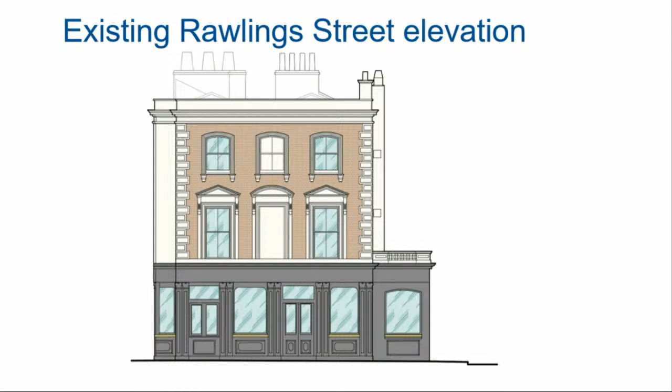So that's the existing and that's the proposed. The other thing to point out is the mansard roof that you can see clearly there above the existing building and above the extension to it.

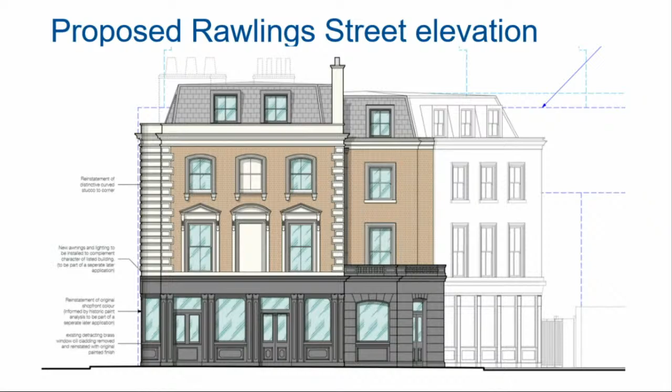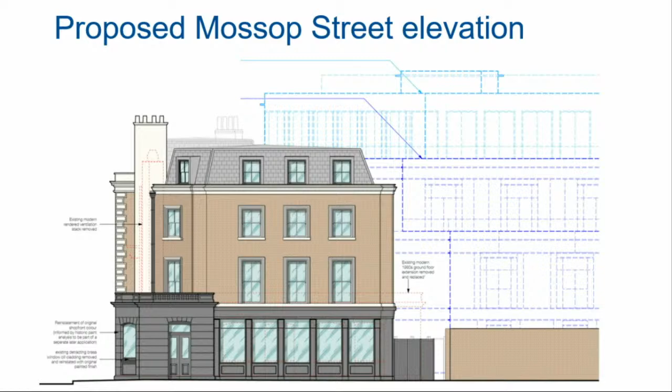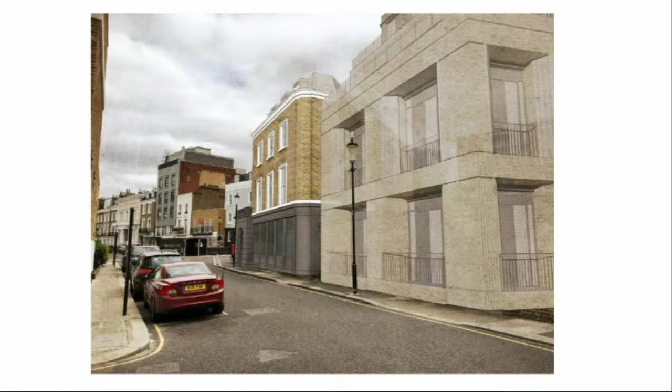And then finally some montages. So the application site, as you can see there, is basically brick with a mansard roof, and on the right-hand side of the image, that's the clearings development.

And that was the last slide. So I'd just draw your attention to the Addendum Reports. I thought I'd confirm that the application came to committee before, and there have been some further letters now. So the total figures in terms of people who've written in are that there are now 12 letters in favour of the development, including from the Milner Street Residents Association. And then there are 2 comments and 2 objections. That's the total through both phases of consultation.

That's the end of the presentation.

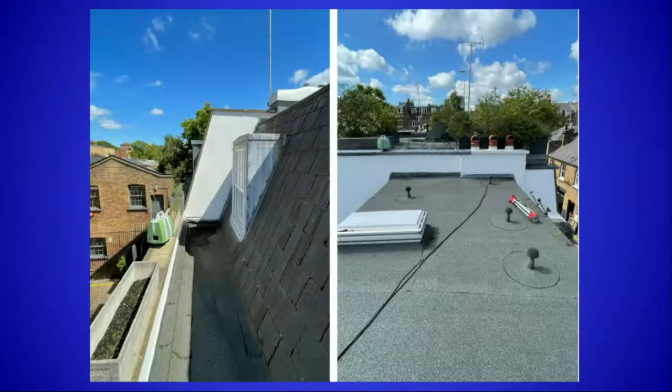Firstly, I thought I'd just show you a couple of images of the existing roof. The left-hand image is taken looking along the front of the property, and you can see the mews down to the left-hand side of the photograph. You can see immediately that the roof to the application property in the foreground is set further back than the one immediately beyond it. The right-hand photograph shows that very clearly. So you can see the property does have a flat-topped mansard roof, but it's actually a narrow version—it's set back at the rear and at the front.

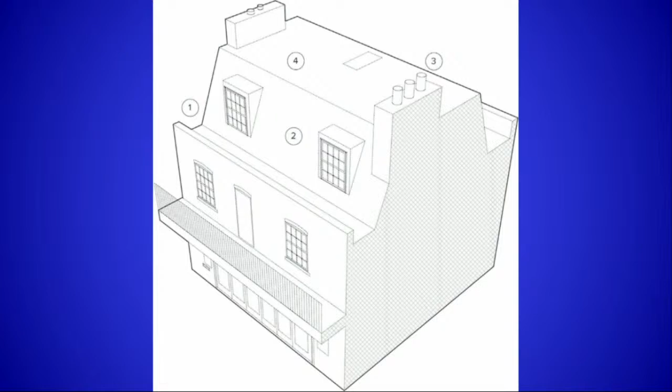That's an image of the existing property, and the next slide shows how the roof would be increased in width at the front and at the rear. You can see in the hatched form there's additional bulk proposed for the front and for the rear, which would basically bring us out in line with the neighbouring property.

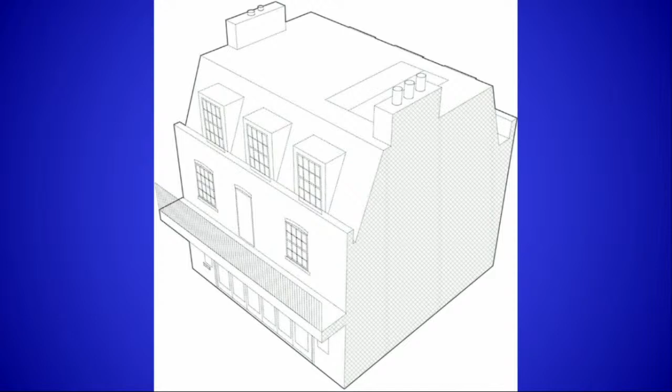You can see that within that extended roof there are now 3 dormer windows proposed on the front elevation, and there are also 3 dormer windows proposed on the rear elevation.

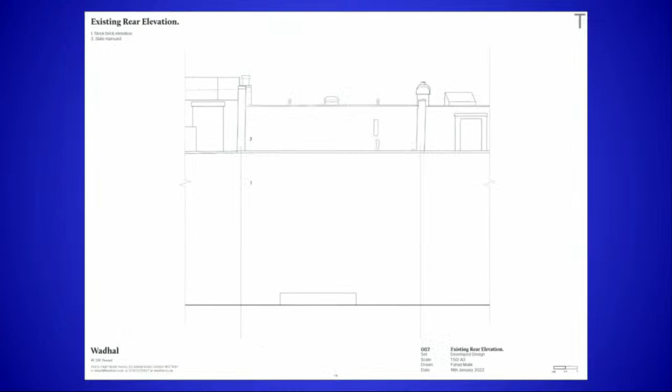I'm concerned about the glass brick aspect of this. It seems to me that, well, personally, I think it's undesirable and unwelcome, but it doesn't seem to me to be something that's fundamental to the application. I'm wondering if there would be a mechanism whereby we could in effect exclude it and take it out of the application, because I do think it would look an odd feature to have there, obviously on someone's back garden wall. Do you have any comments on that point?

The glass bricks are proposed in the rear elevation at high level. You can see them here at the left-hand side within the rear elevation in section. They are a small part of the application. I think it would be possible, if you're so minded, to condition those out. I don't think they're essential. Clearly they're part of the proposal, but the applicant clearly considers them to be beneficial. But it's certainly within your powers to add a condition removing those, if you're so minded.

So that would be an extra condition, as opposed to amending condition 2, which is obviously compliance with the drawings. You think that would be the correct way of doing it? Yes, it would be an extra condition. At the moment there's condition 11 that recommends obscured glazing for the dormer windows. So that would be a condition in its own right, not amending any other condition. So are you sure condition 2 wouldn't have to be amended? The approved plans, would they show the glass bricks? Yes, they would, as you can see in the section. So condition 2 would need to be adjusted to accommodate that.

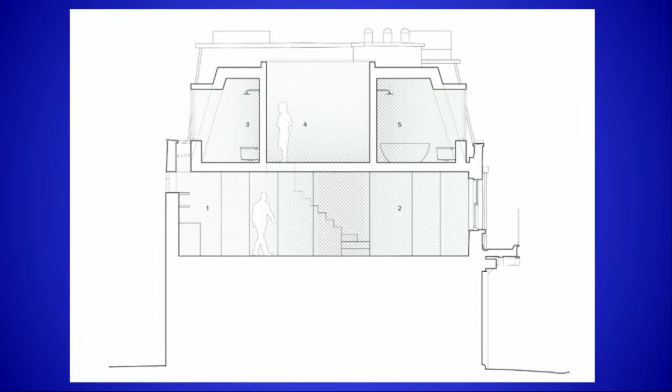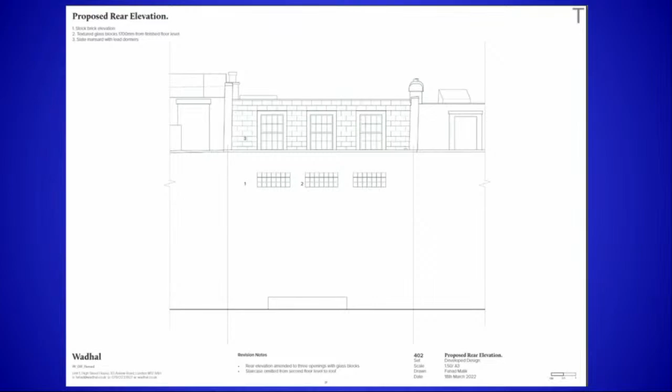Well, in that case, we need to make a decision about this. I think my own view is that in planning terms, we do have to give quite a lot of weight to the fact that the other buildings in the Mews have got these higher level mansard extensions. Obviously from the point of view of someone looking onto the back of this property, it's very desirable that at the moment there isn't really anything there. But when you look at the context, I think unfortunately the idea of having a new mansard extension is probably something that would have to be considered acceptable.

I'm not particularly happy about the glass bricks. Personally, I think if there is a proper mechanism, as Mr. Taylor seems to indicate there is, we should condition that out. I think it's an undesirable feature which is not fundamental to the application, and I think we're entitled to do it. But what do others think?

Sam? Yes, the way I was thinking about it is exactly that, and my particular concern about the glass bricks is not just that they're incongruous, but also their position - even though they're not absolutely huge, they're in that rear wall that feels part of the enclosed garden, whereas the mansard is set back and at a higher level. So I think it would affect both living conditions and character and appearance. I'm not happy with the glass bricks.

Other views? Anyone? Aaron? I just agree with you both, basically. Yeah, right, thanks. All right.

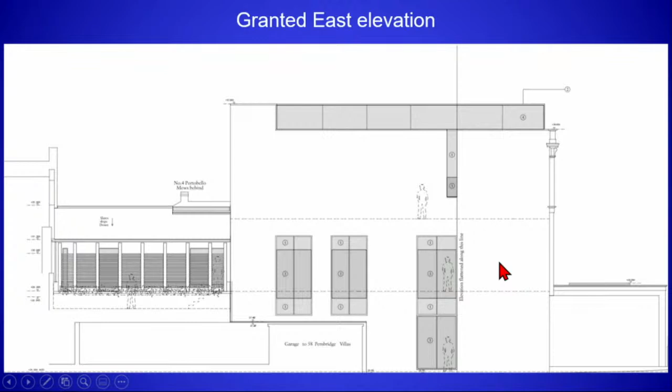What's now proposed is basically to vary the glazing. Those are the existing glazed areas and now the proposed glazed areas. The 4 oblong areas of glazing, I'd suggest, are actually a little neater and perhaps less obtrusive than those that were granted originally.

Included within the application now before you are a number of features within the flank wall. I don't know if you can see them at that distance, but essentially there are 3 ventilation louvers - one there, one here, and one there. There are also 2 flue pipes, 2 small flues that emerge through the boundary wall between two of those louvers. So there are 3 louvers and 2 pipes proposed in the flank wall.

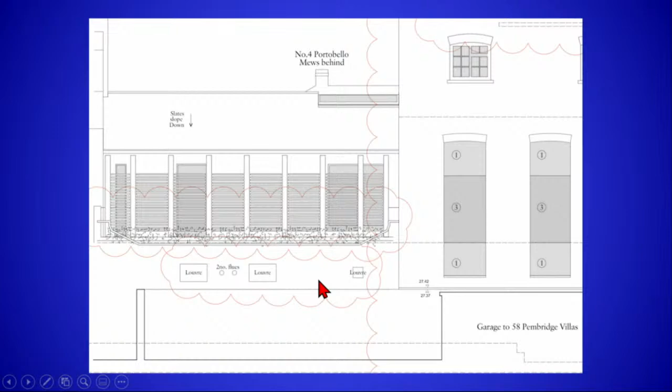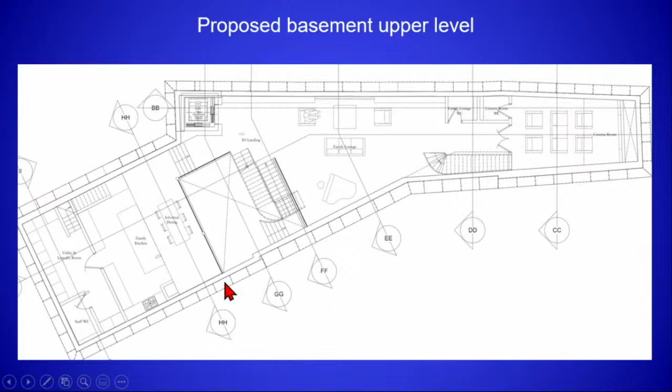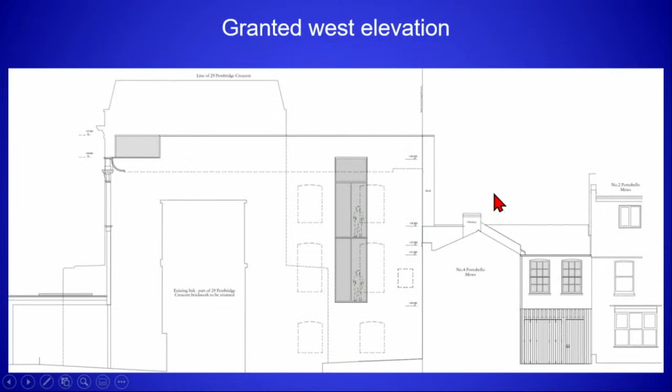Just for completeness, this is the other side - the west elevation, the granted west elevation and the proposed west elevation. There are relatively small adjustments on that side. That's the last slide, Chairman.

I've just been reminded that I was also going to recommend orally that condition 11 would need to be varied. The wording in condition 11 doesn't quite make sense at the moment because it reads 'shall be obscurely glazed and fixed shut up to 1.8 metres', whereas what it really means, and what it should say, is 'to be fixed shut, and obscurely glazed up to 1.8 metres'. That makes sense.

I think that's the point that Councillor Gardner makes in one of her comments.

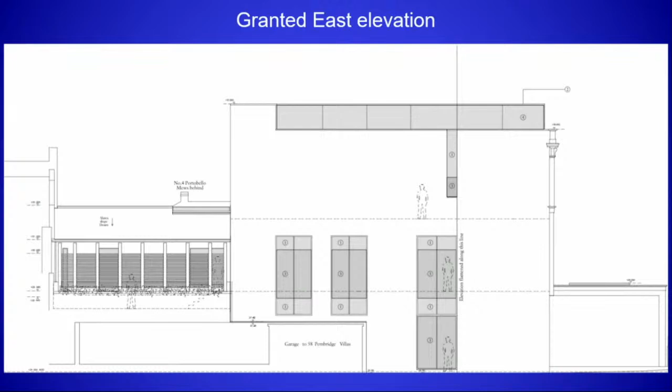The same point applies to the louvres and flues. Whilst they're proposed to be moved further away, they'll still be very close to my garden. At the very least, the application should be deferred and a report prepared showing what air will vent from these air brick louvres and flues, whether in theory they would be harmful, and then a condition requiring a follow-up report measuring in practice how they work, with a requirement to cease use if air output breaches harmful thresholds and causes a nuisance. But what would be most correct is that the application should just move those bricks, louvres, and flues well away from my garden.

The application has such huge external facades, so this would be easily possible and much more considerate. On noise, I believe you mentioned this already, that the noise impact assessment to comply with Section 9 is missing, and that should be included. There's no reason not to include that.

Third, glazing. Planning permission initially in 2013 granted larger amounts of glazing on the eastern elevation than currently proposed, however all of that was intended to be obscured. In the variation in 2014, PP 1407745, the revised approved drawing shows fewer windows but crucially shows that 2 metres of the glazing should be obscured from ground floor level. The proposal now only requires 1.8 metres of obscured glazing.

Planning policy CL5, requiring good living conditions, in particular reasonable visual privacy for occupants of existing properties affected by new development, has not been watered down since the previous policy requirements on this issue in preceding local plans. Therefore, there is no policy justification to reduce the amount of obscure glazing from 2 metres to 1.8 metres. The officer's report is simply incorrect where it states that the applicants are now seeking to change the glazing back to more akin to the originally approved 2013 parent appeal scheme. This error in the officer's report is misleading, and if not corrected, would be capable of judicial review.

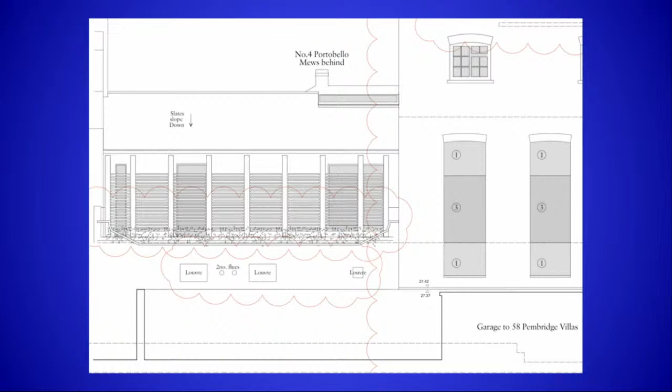The windows on this flank have been designed to allow light into the internal accommodation given the constrained site. However, to prevent any overlooking or privacy issues, these windows will be obscurely glazed for 80% up to 1.8 metres, in line with condition 11 of the previous permission. I do not consider this to have been a change to the previous permission, as outlined by Mrs. Salmon. Just to address light pollution lastly, it's also considered that the extent of the glazing does not differ from the existing permission, and as such there will be minimal change to this.

Thank you for allowing me to speak this evening, and I am more than happy to answer any further questions. Okay, thank you very much. Questions to either party? Sam? Yes, good evening.

Just getting clear on the level of obscuring of glazing. I think we heard from the objectors that it was originally 2 metres of obscuring, and now in this variation it's now 1.8 metres. I just wanted to understand, just wanted to see whether that was agreed as a fact between the two of you, but you were also saying as the agent that there was no change.

Yeah, it's my consideration that it was 1.8 metres as in the previous permission. Condition 11, I believe, outlined it. I don't believe there to have been any change from this. We are seeking to maintain the 1.8 metres obscure glazing, which allows for light at the bottom, with obscure glazing in the middle and light at the top, to allow light into both levels of internal accommodation.

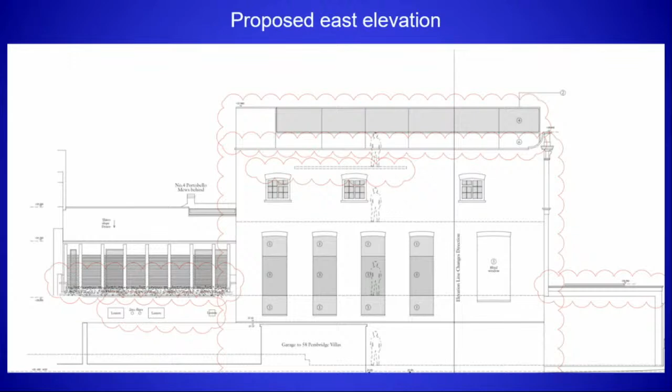Can I ask the agent? I'm referring to the Addendum Report. A couple of pages in, there's a photograph showing essentially looking out at the back garden, with a table and cushions. And then on the rear garden wall, there are 3 sort of red marks. Now, is that where these sort of air bricks are going to be? I've only seen this image tonight, but yes, that image, yes, I beg your pardon, so yeah.

The air bricks would be at a similar height, yes, but much less intrusive than a Louvre or a flue. And there's only 2 of them, and they are the size of a brick, a standard stock brick. So the red splodges are roughly in the right place, in terms of height, but you're saying there'd actually only be 2. There's only 2, yes. And in fact, they're a kind of air brick that is coming up from the lower basement levels. Yes. Okay, all right, I understand. All right, thank you very much indeed for that.

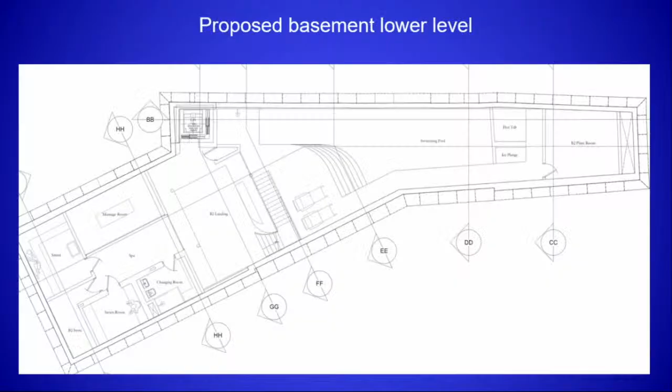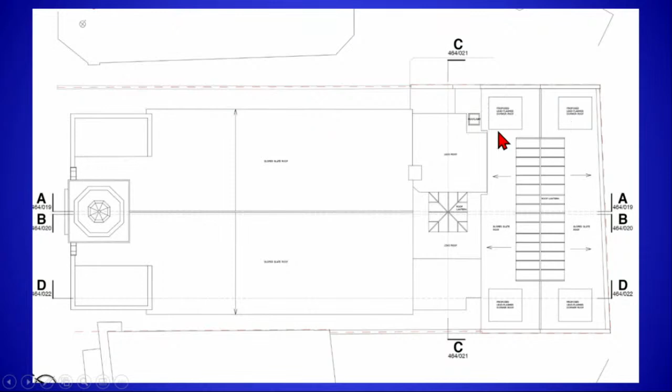In each case, the dormer window is a relatively minor addition to the roof in physical terms. That's useful again to show the proximity around the boundary of the site. In plan form, over at the right-hand side of the image, you can see the 4 dormers now, 1 in each corner of the pitched roof. Then in that image, you can see a section through the roof at the back, with the dormer windows popping out on each side of the pitch. Then finally, the front elevation, you can see one of the 4 dormers present at the right-hand side of the church in the elevation, and another at the left-hand side.

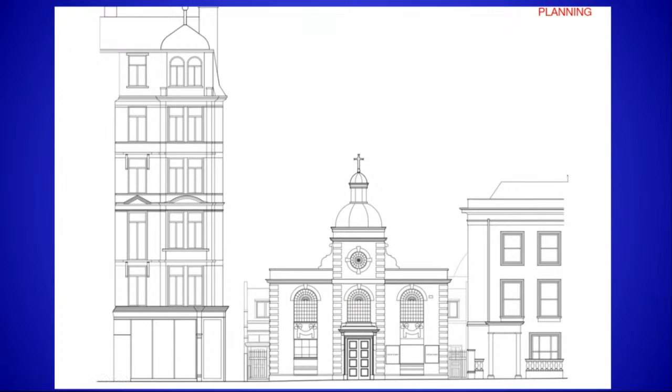Obviously, those are set well back, but in elevation that's what you would see. Then just a closer-up section, so you can see again, the dormer windows would be lead-flashed on each side, and they would be obscurely glazed on their front. That's the last slide, Jim.

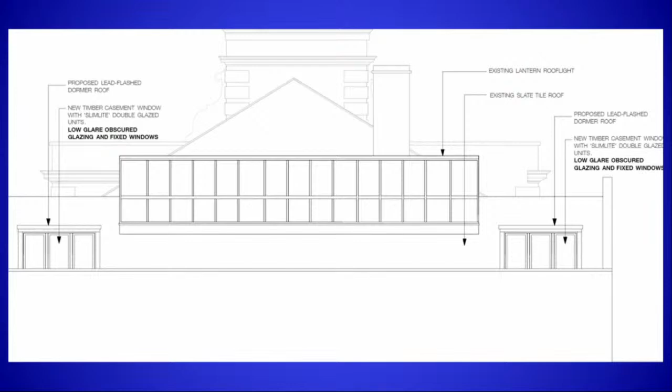So I represent one of the properties immediately closest to Chepstow Place. I'm also speaking on behalf of 3 other objectors, and all of us reside on the side that is not shown in this permission. There are 4 dormer windows, 2 of which are southeast orientated, and they have not been shown - all the plans deliberately don't show our side, even though we are the closest properties to it. I'd like to make that point.

Another point of clarification is that it's called a nursery. It is not a nursery. It was a nursery 16 years ago, and then the developers tried to change the purpose from a church hall back to a nursery, but they are now advertising it as a gym stroke rehabilitation centre. So it's not being developed as a nursery.

Our real objection, collectively, is about the fact that we believe the planning officers have not had sufficient access to view the impact on our side of the building regarding the increased sense of encroachment of these dormer windows. It even says in the application that side of the building is not visible from the public spaces in the street. So the recommendation is being made on 2-dimensional drawings, as you've seen, that don't even take into account the proximity of these windows.

The reason I'm sitting here, for example, is that I've measured out the proximity to our bedroom and bathroom window from about this level. So it's very, very close. And it's a strange structure and a strange angle that comes into our house.

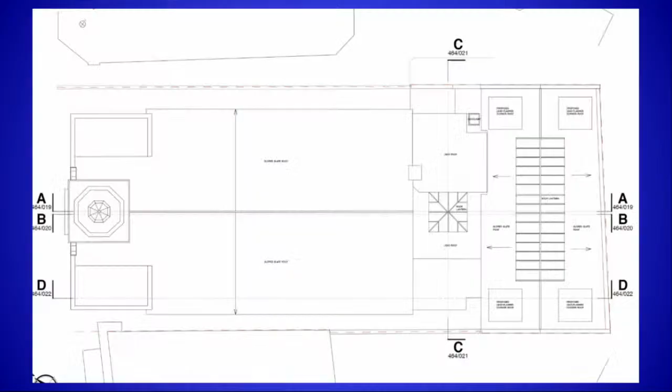Essentially, at that part of the building, there are 2 floors, so these would be intended to provide light for the upper floor. I don't think you can see that from any of these images, but if you look in the pack, the last drawing in the pack before the public comments shows a different section taken through the rear roof, so you can see there the relationship of the proposed dormers to the floor height, so that they would be high level dormers.

So it's the last drawing before the public comments. Yes, so quickly, there is actually a second floor where people walk around, do activities, and be able to see outside of those windows, basically. Yes, there's 2 floors.

Okay, so we need to make a decision. What do people feel about this? I think it's quite near neighbouring properties, but given the nature of the buildings, and the fact that it's going to be obscure glazed and has to be fixed shut, I think that probably on balance is something that's sufficient. But I don't know. What do others think? What do other people feel?

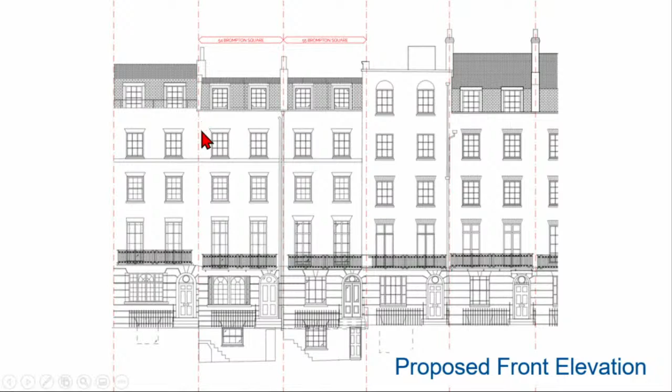So here you can see in this slide the removal of the existing mansard, hatched red, and then as proposed, where the existing mansard is, you now have a full story continuing the facade up, and then the new mansard level above that. You can see the height of the adjacent properties relative to the proposal.

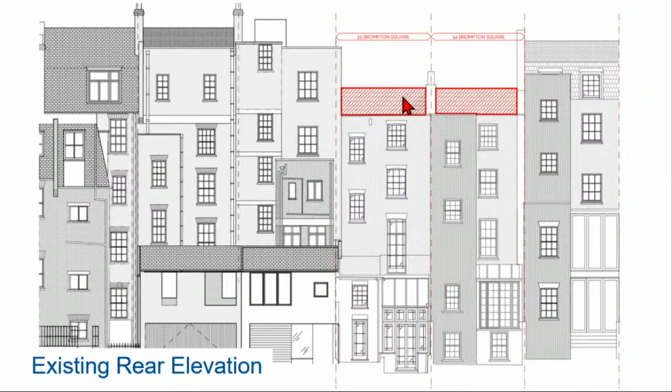This is looking at the proposal from the rear, so again the red hatching denotes the demolished existing mansard, and then the proposal in terms of increasing that rear main wall and the mansard, with the new mansard extension sitting on top of that.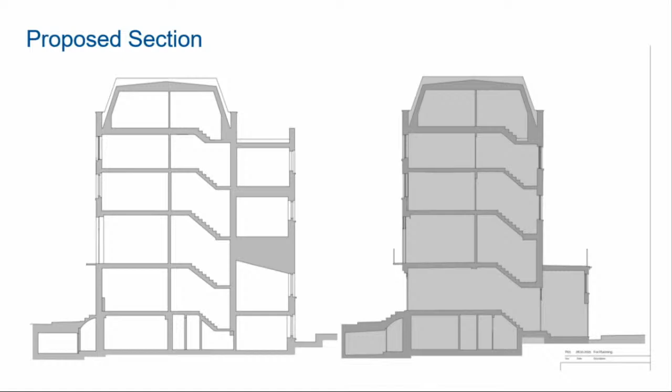Thank you. Now, there are no speakers for this. I just wanted to quickly note that there have been some objections from people who live in the Mews properties that are behind the buildings. But I think we can see from those photos that it's quite clear that the properties on either side of Brompton Square have over the years been extended upwards. So in a way, this is filling in a slightly odd-looking gap in terms of the townscape, rather than creating something that's suddenly higher or looks very, very incongruous.

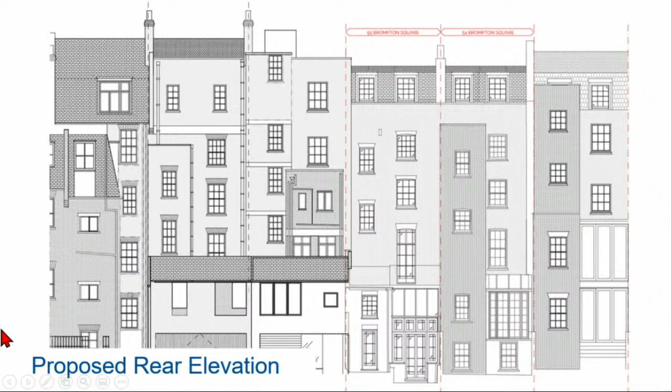If we can now turn to 98 Lexham Gardens, and I think that's back to Derek. Okay, I need just three slides to show you for this one.

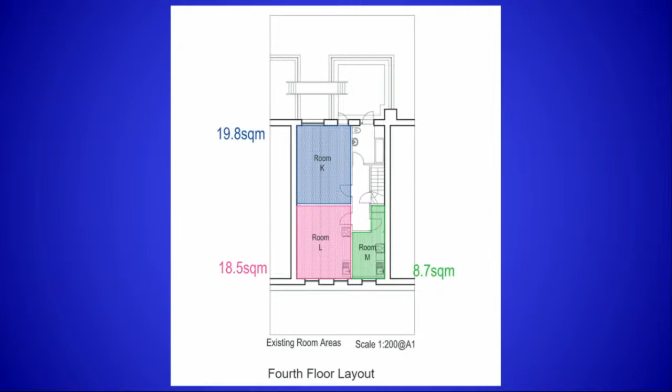That's the existing floor plan at the 4th floor level. You can see there's room K, room L, and room M at 8.7 square metres. Those three bed-sitting rooms would be converted to form 2 studio apartments, and you can see the studio apartments in their plan form there. That's the proposal.

Okay, any questions about this? I'd like to raise an issue which I mentioned earlier, about parking permits, because there's a recommendation that we should have a legal agreement meaning the 2 new studios created can't have a parking permit. But at the moment, my understanding is that the 3 existing units, although one in particular is really a small room, do actually have the ability to apply for a parking permit. So the number of units entitled to a parking permit is actually going down by 1. Is there an officer response to that? Seems a bit odd to my mind to do that.

Well, in pure numbers, 3 existing bed-sitting rooms would become 2 studios, so yes, they're going down by 1. I did check this with our highways team, just in case there was much to discuss on it in their opinion. They said that current data hasn't changed insofar as car ownership levels in bed-sitting accommodation are still markedly below car ownership levels in self-contained flats, and therefore, in their opinion, there may be one less unit, but in terms of car ownership there'd be a significant increase in the likelihood of a car seeking to park on neighbouring streets. So they reaffirmed the requirement for that agreement.

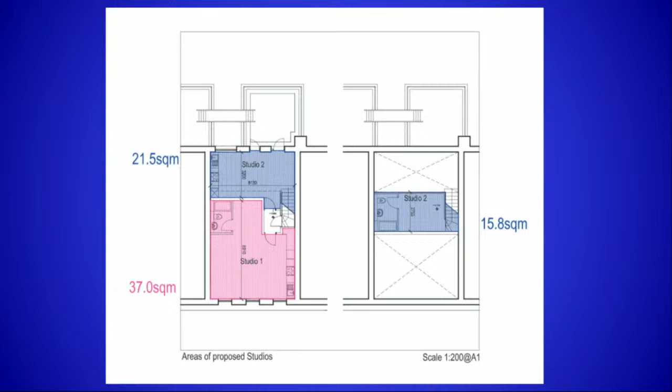If we can now turn to the application for Oxford Gardens. This one is an application for planning permission to extend the existing basement and insert a light well and a small extension. The first slide shows a section through the existing property.

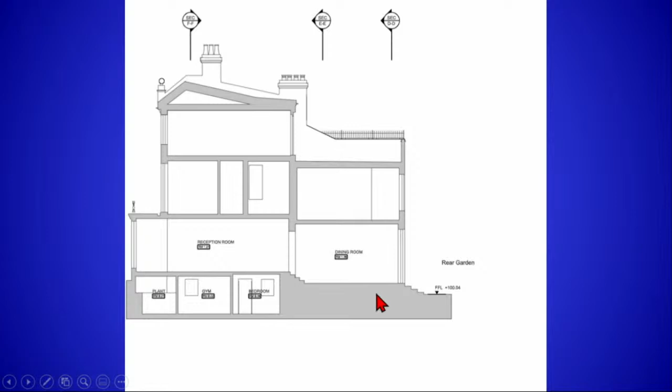Towards the left-hand side of the image, that's the front of the property, and there's already a basement level containing a bedroom, a gym and a plant room. Underneath the rear of the property at the moment there is no basement level, where it runs down to the garden.

The proposal is to form a new basement level beneath the rear part of the property, a single storey proposed to be inserted beneath the rear. The section line goes through the media room that would be provided as proposed.

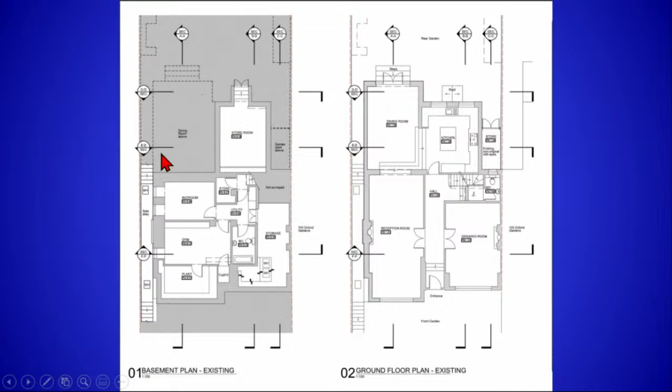In plan form, that's the existing basement plan on the left and the ground floor plan on the right. At the moment there's a void under the rear left-hand side of the property, which in the proposed basement plan would now be filled in, where the media room would sit.

That's a closer-up image showing how it relates to the other basement facilities. Any questions about this? Seems fairly straightforward. No questions, okay, in that case I think we can move to a vote.

The recommendation is to grant. Can I see those in favour of granting, please? So that's granted, thank you very much.

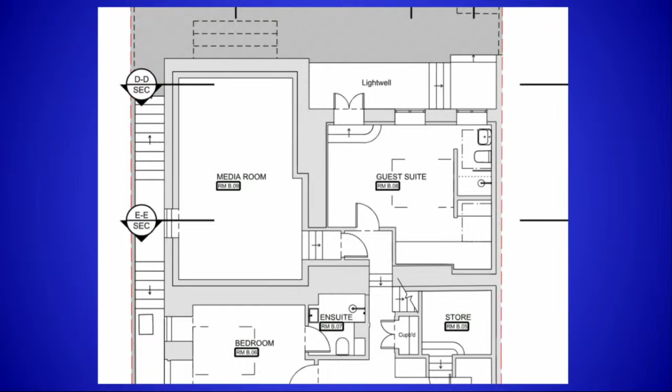If we can now move to Wallingford Avenue, please, and then to 6 Wallingford Avenue.

Any questions about that? No, okay. The recommendation here is to grant planning permission with the conditions set out in the report. Can I see those in favour, please? So that is agreed.

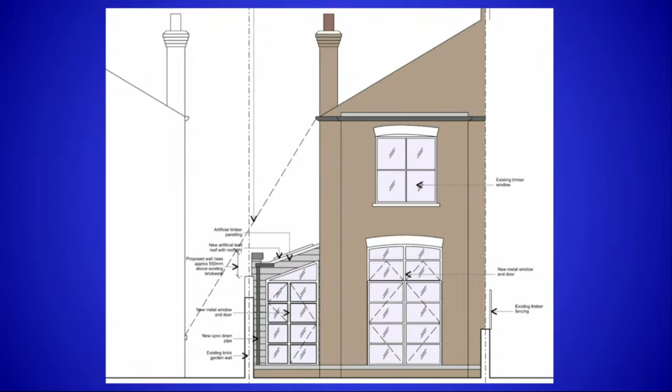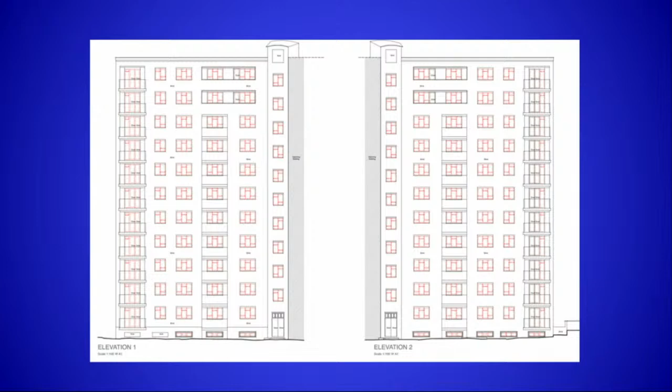That's Treverton Tower in elevation, and then Raymede Tower, you can see the architecture is the same as they were built as a pair. That image shows in red the proposed demolition, in other words it's proposed to take out all of the existing windows as you see there.

But the glazing pattern remains consistent, it's just the frame that changes. And that's the last slide.

Very good, any questions about that? No. Okay, I think there's actually no objections, and in fact a couple of people actually supportive of this, so that's worth noting. The recommendation is to grant. If I can see those in favour, please. So that is agreed, good.